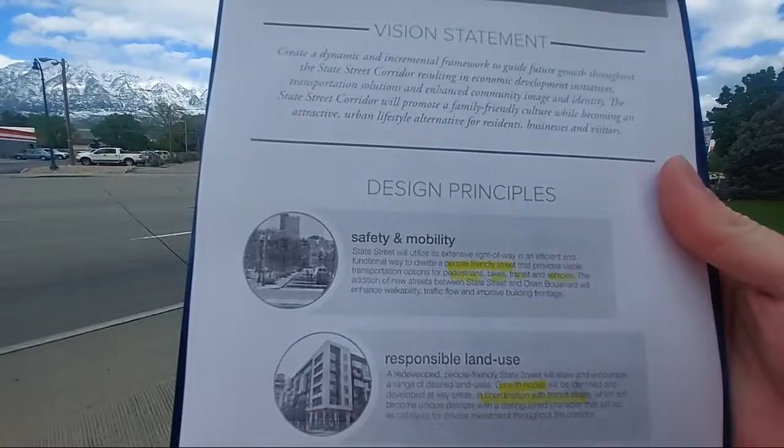Because we use responsible land use, and that idea of growth nodes, where at the big corners at each intersection will allow things to grow up a little bit. If we're going to have high density happen in our community, why not put it here where there's people and cars, and just have it do everything, but do it in a way that makes sense.

Mac writes, sidewalk just ends over there. Well, it doesn't actually, it curves up here and walks along the businesses. I thought it was a nice improvement. Kind of reminds me of, not that I'd compare Orem, Utah to Las Vegas, but the area sort of a block north of Bellagio, by the Fashion Show Mall or whatever, the sidewalk comes way in by the shops and makes it a lot nicer.

Las Vegas Boulevard's an example of how you could kind of make it all work. They'd want to do it their own way.

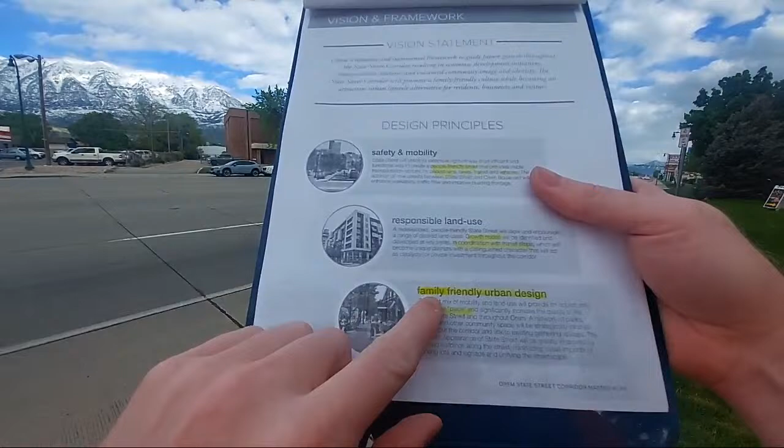And then finally, because again Orem is obsessed with their tagline, Family City USA, family-friendly design. The idea being, this isn't family-friendly. If you're in a minivan, you could get hit and killed, and if you're on foot, you could get killed, and if you're riding a bicycle, you will get killed.

So they put together this idea of saying, okay, along this strip, each of the big cross streets, they would allow up to, I think it was 150 feet. So they could really grow very, very tall.

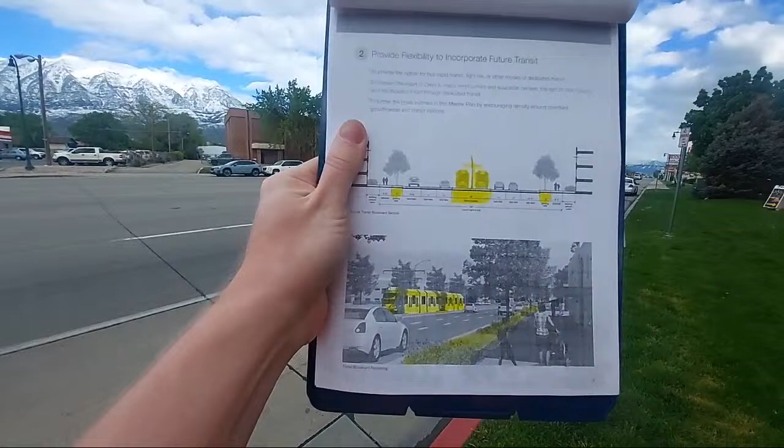So this is about where we were at when I moved away, 2018 or whatever, where this was the vision of what State Street was going to look at into the future. The light rail, it might be a bus rapid transit system by the time they do it, but if you want a dog, you start by asking for a horse. That would take a significant investment from the state to do that. Orem couldn't pay for that themselves.

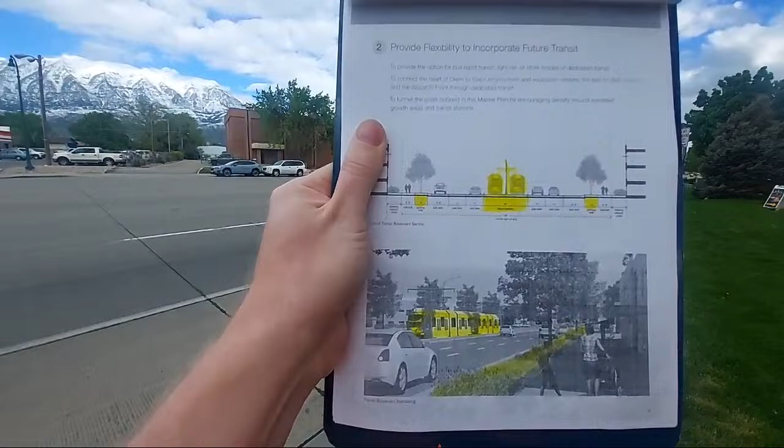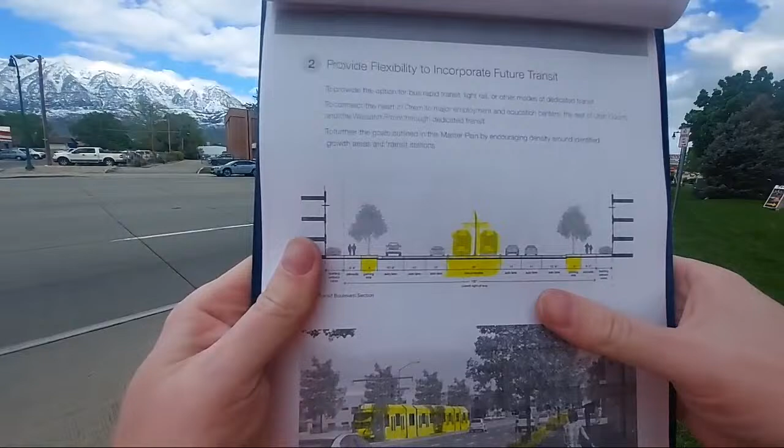And then changing so they still had 3 lanes, but you narrow them a little bit. So you make room for the train, you put in some room for the trees, and that starts getting the pedestrians off. And if you're going to this much trouble, it also allows you to renegotiate access management, reducing the number of driveways and trying to make it where there's fewer places where people on foot or on their bike are crossing.

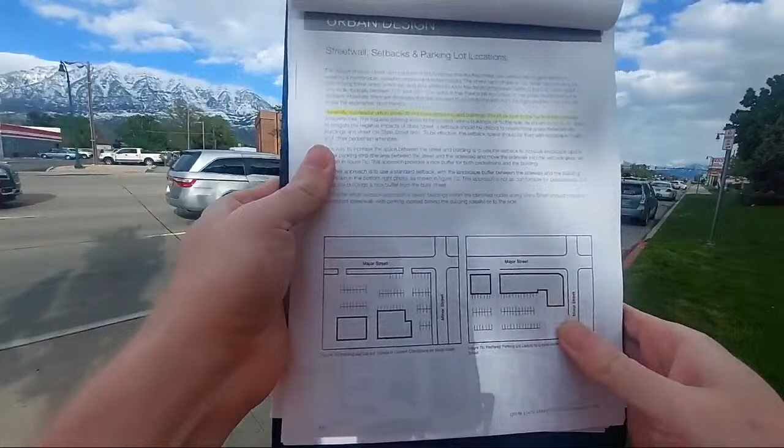So here's another thing they had in their plan that they adopted into code. I like this a lot: if it's eventually going to turn into a street where there's people walking along it and trees and everything, put the businesses right up against State Street and the cross street. Instead of what we've been doing since World War II, where you have the parking lot in front, you still have people arrive by car—that's perfectly good, they just park behind the business, but then have the front doors face the street. And that makes it really nice.

Marius007 writes, are they actually going to carry out this plan? Well, it's funny you ask that, because they were, but then something happened. And this is kind of the big takeaway when we have the nuanced discussion on stroads or urban planning or whatever: you can only do—let's get the sun out of the shot there—you can only do what your constituents allow you to do.

And since this thing got built, nobody loved it, and a number of rental-only apartments got built up and down the corridor here. Typically those construction projects you see now, I don't know if the fire code changed in the last 10 or 20 years, but those developments where the ground floor is metal or concrete—that's usually commercial, maybe they put the parking behind it or underneath—and then they do about 4 or 5 stories of wood frame, stick frame development on top of the concrete. So you end up with this 6-story building roughly.

And it makes high density housing cheaper to build because you can build it out of wood. And with modern fire suppression sprinkler systems and alarms, they can actually make a 5-story building safe. And in a place like here it's great, because stick frame wiggles in an earthquake, and the more the building can kind of wiggle, the less it's going to snap and break and collapse on people. So it's a win-win-win-win-win.